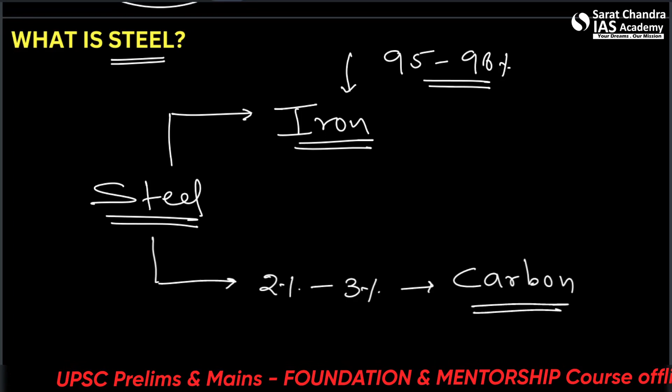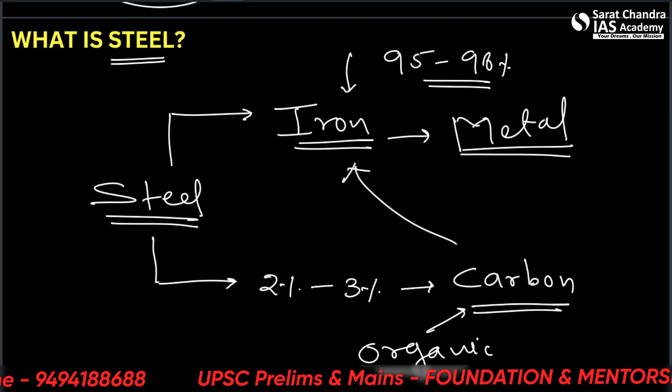So iron has metallic properties. It's a metal, inorganic substance. And carbon has organic properties. It's a non-metal also. So it gives certain different properties to this steel, which is an alloy. So they are mixed at high temperature. So the physical and chemical properties change, and especially the physical properties change.

Such as, let's say, tensile strength, malleability, the complete internal structure of the cross section. So many things change: the bending power, the elasticity coefficient. So that's why steel becomes much more useful than its base, which is iron. And steel is the largest produced commodity in the world also, largely used in the construction sector.

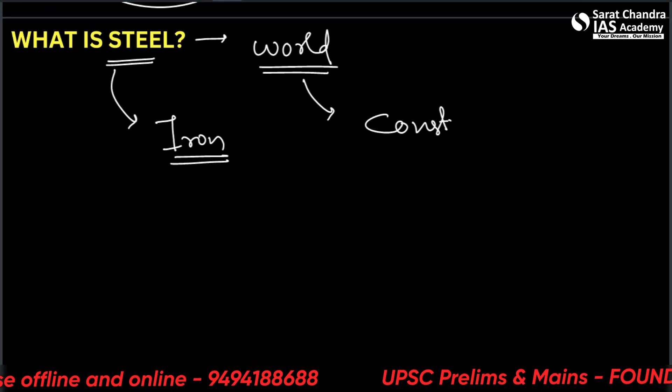There are many different types of steels. Further, let's say we add iron plus carbon plus chromium, then it becomes stainless steel. So it also protects against rust. Rust is a chemical phenomenon, please remember. The oxidation of the outer layer of the iron gives us rust. Okay, so this is what steel is.

Let's now see what is the context here. So steel is one of the core pillars of today's society and one of the most important engineering construction materials. However, the steel industry is among the three biggest producers of carbon dioxide. So if we are mixing carbon, we are not talking about the carbon that is getting mixed, because it has been trapped inside the material. We are talking about another carbon that is being released in the air in this production method.

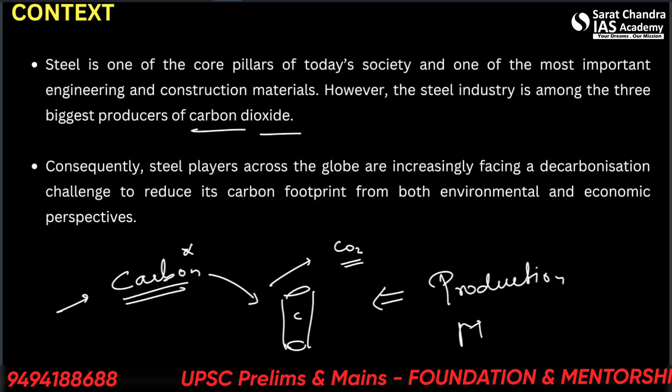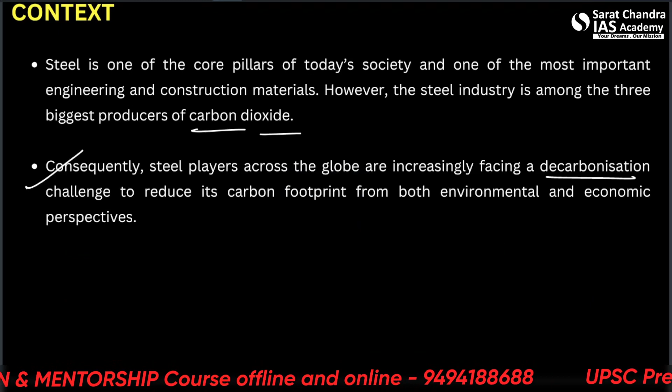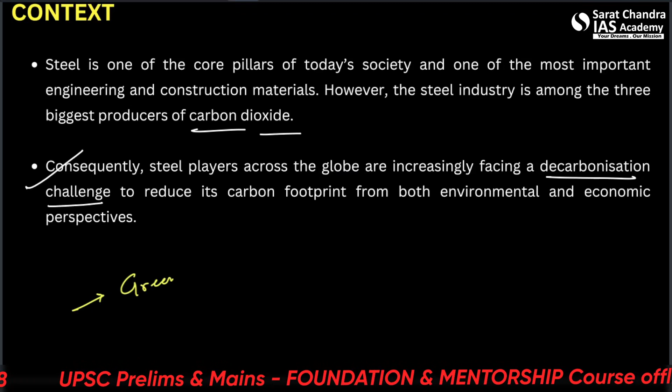All right. So consequently, steel players across the globe are increasingly facing a decarbonisation challenge, or basically pressure, to reduce their carbon footprint from both environmental and economic perspectives. So we talked about both perspectives, such as shift to green plus economic, meaning lesser imports, exports, etc. So India is currently the world's second largest steel producer after China. Please remember this fact.

Various analyses show potential for multifold increase in steel consumption by 2050. So of course it's related to the population. More population, more needs, and one of the needs is shelter. That leads to more construction, and that leads to more steel being produced and consumed.

So production of steel in India is set to increase significantly over the next few decades to meet the increasing domestic and international demand. Decarbonization of the steel sector has a big role to play in a low carbon India as an essential ingredient for the country's green future. All right. Now let us see where is steel produced in India? What is the current scenario?

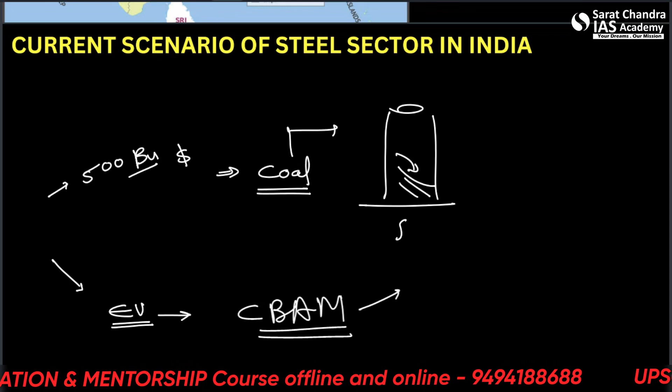Decarbonizing the steel sector is also important from the perspective of the emerging international regulatory landscape. The EU has recently launched a new rule, the CBAM. What is CBAM? It basically favors domestic green steel industries, and its name is Carbon Border Adjustment Mechanism. It's a separate topic, so we are not going to cover it here. Just read about CBAM.

So let's see what the initiatives are to decarbonize Indian steel. Just a second, I'll cover it here. One is the National Green Hydrogen Mission. You can read about this. It also promotes green steel. Green hydrogen is very much in the news and a very important topic. Another is the steel scrap recycling policy of 2019. Third is the National Solar Mission, which promotes the use of solar energy and also helps reduce emissions of the steel industry.

Two more things are there. One is the Industrial Deep Decarbonization Initiative, launched by the Clean Energy Ministerial. It stimulates global demand for low carbon industrial materials, including steel. And there is one more initiative, known as FeRRoRESTA. So what is this? It is the Kalyani Group's first green steel brand. This can also be asked in state level exams.

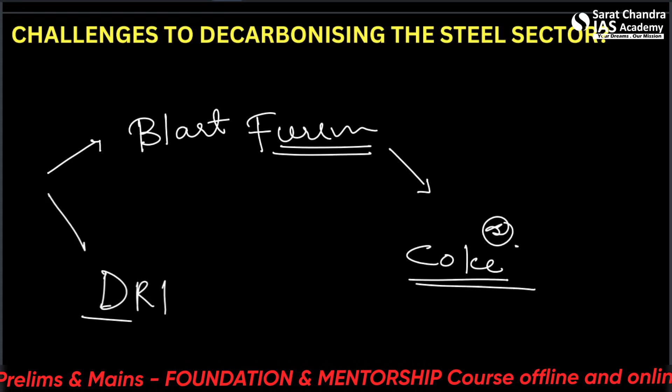All right. So let us see the challenges to decarbonization in this sector. There are two basic steel production routes. One is the blast furnace method, where the primary fuel is coke, a form of coal. Another is DRI, the direct reduction iron method, where the fuel can be coal or natural gas. The blast furnace emits more CO2.

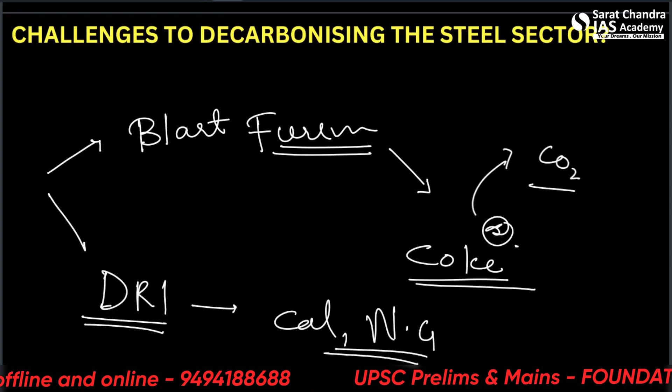And India uses the blast furnace method in 90% of production. So this is the issue here. The fuel being used is the issue. So what can we do? Hydrogen has the potential to fully replace coal or gas in the DRI process. So we can opt for the DRI process and replace coal with green hydrogen. But what it will do eventually is increase the input cost.

So every sector must grow together in order to make it feasible. All right. So green hydrogen can be produced for this. Another thing is scaling up. Let's say challenges in scaling up net zero technologies. So the first is cost. Cost is the biggest economic hurdle here.

Global estimates suggest that the investment for setting up DRI steel plants with upstream green hydrogen generation could reach up to rupees 3.2 lakh per ton of production. So that's a lot, and we are unable to do this right now.

economic burden. Another thing is carbon capture and storage: carbon, even if it's emitted, can be captured and stored. This is also very economically harsh on the system. There is no supporting infra at present. All right. So let's see what can be the way forward from here.